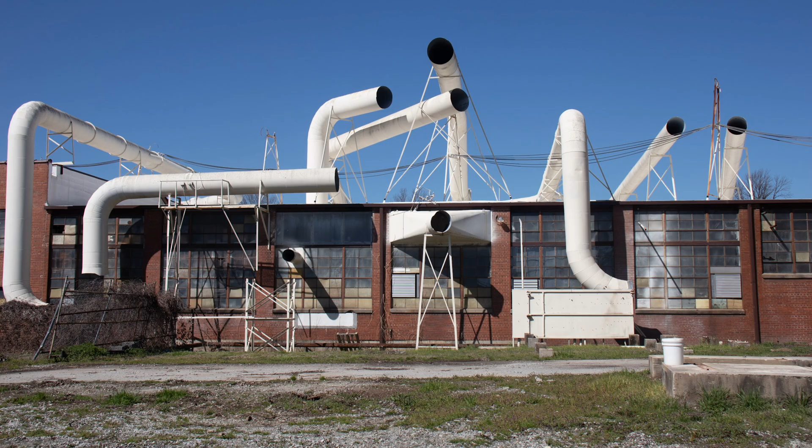So what I thought I'd do today to start off was showcase some highlights of Southwest High Point and some investment that's currently going on, whether on the public side or the private side, and look at some incredible opportunities with regards to the Heritage Greenway. When we were here almost a year ago, a little over a year, in February of 2023, we had the opportunity to take a deep dive and look at Southwest High Point.

So with Dorothy and the Southwest Renewal Foundation, we had the opportunity to look at the various areas, each with a distinct character, with a long history, close proximity to downtown, as well as the industry, manufacturing, and residential components in the area.

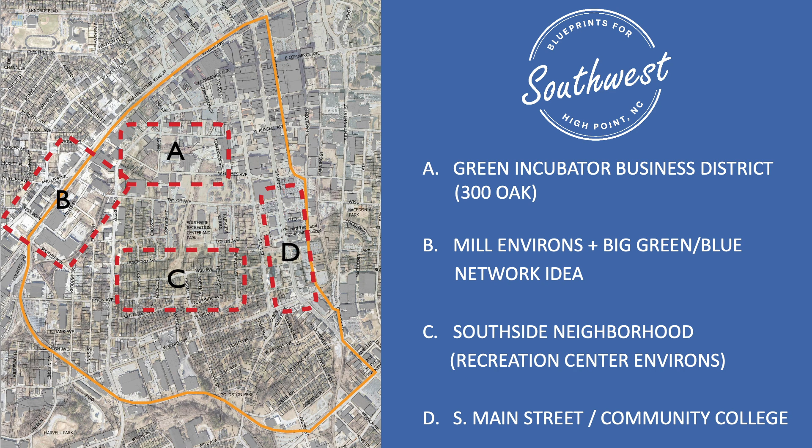This was looking at the Southwest, from 300 Oak, which the city has recently invested in with the Green Incubator Business District, to the Mill District along the rail line, whose economic reason for being has changed over time but still has incredible building stock. Then the South Side neighborhood around Fairview Elementary and the Recreation Center, and South Main Street, looking at linkages to GTCC and how to improve those connections—helping build up the whole neighborhood with access to jobs, education, and general livability.

So many of you all, a lot of familiar faces today. It's wonderful to see you all again. We're grateful to be welcomed back.

This was the process we did, walking around, driving around, taking a thorough look at Southwest and looking at the opportunities—some incredible structures and some incredible opportunities to build more complete, especially as the industry has changed slightly, building on the long legacy in High Point while also adding to that.

The South Side neighborhood—looking at opportunities for additional housing and ways, given the long legacy and history in the neighborhood, to maintain that residential character and help existing residents and community development initiatives ongoing in the city and previous planning efforts, really taking a look at the adaptive reuse of buildings and how to continue that momentum and energy.

We set up at Pandora's, working on site, starting to sketch some designs and ideas, and that was a really fantastic process. We were able to have a lot of solid community conversations and get input to move forward.

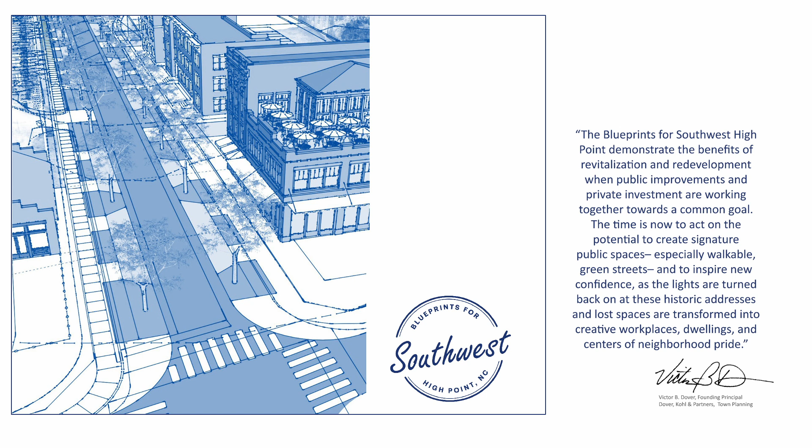As we came up with these different designs and scenarios, we created a document called the Blueprints, which is guidelines and recommendations for moving forward together. So I'm going to show you some of the ideas and recommendations.

This, I think, is a really great example—something we looked at in February 2023, where a small building can have a big impact. We talked a lot about when a pebble drops into water and the ripple effect from that. This is really exciting at 520 West Green and the opportunities that have come along with this property.

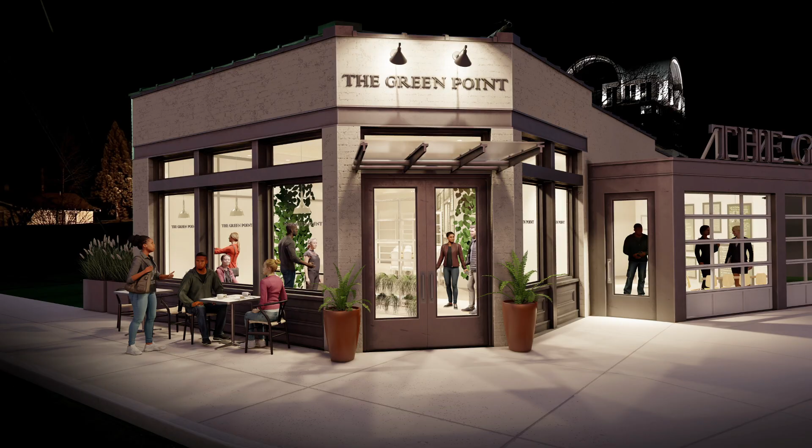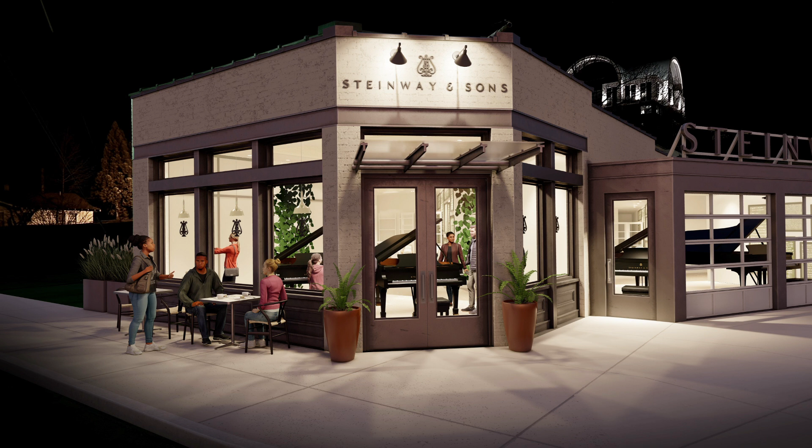Looking at how a building with the structure can have a variety of uses over time, how that building can be refurbished and rehabilitated for new uses. This is a very exciting project that Ritvan has been leading, and we're excited to say it's opening soon—is that correct for market?

A great opportunity, and it was really a wonderful process to start drawing some ideas and then have someone ready to give back to the city and make this building more complete. So very exciting with Steinway coming in.

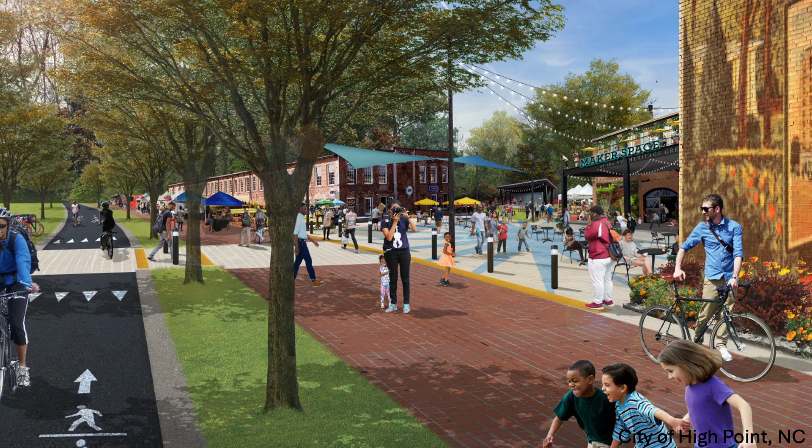300 Oak, with the city investment of the Green Incubator District, and also looking at the Greenway. One thing with 300 Oak and the Greenway, which the Southwest Renewal Foundation has been very helpful in leading, is the strategic infill and looking at how over time the properties can become more complete.

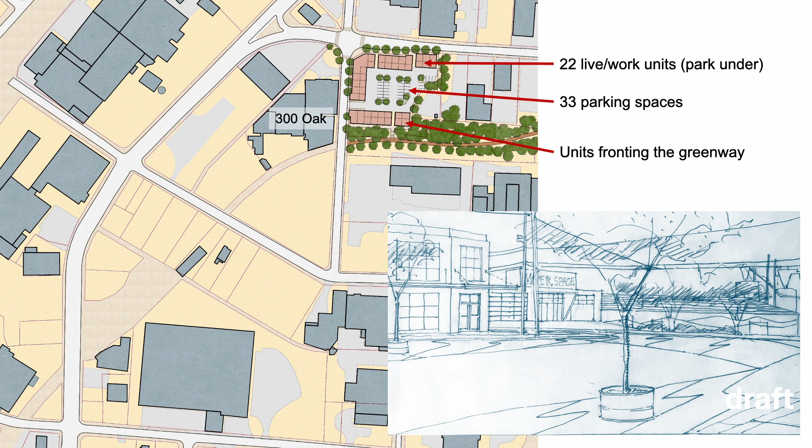This is incremental development, so it doesn't happen overnight, but over time. By having a plan in place, you can understand how to build those spaces more complete. This also shows an example of a mix of uses—a mix of housing types and a mix of uses.

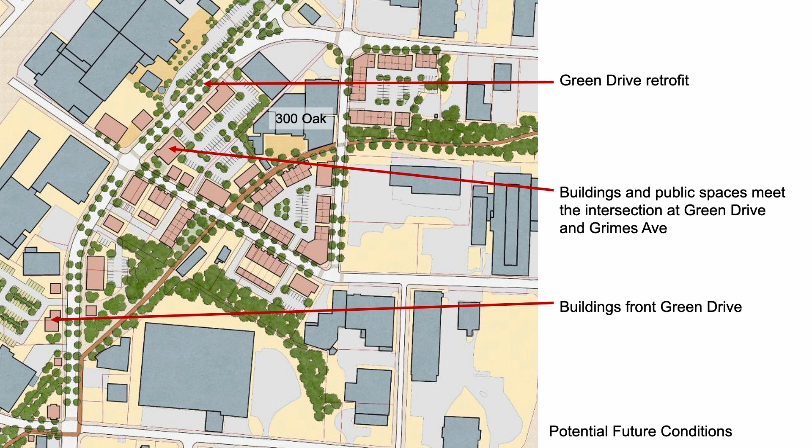How buildings confront the Greenway, and how to build a more complete green avenue—with the Greenway coming in with additional development and opportunities to front that space.

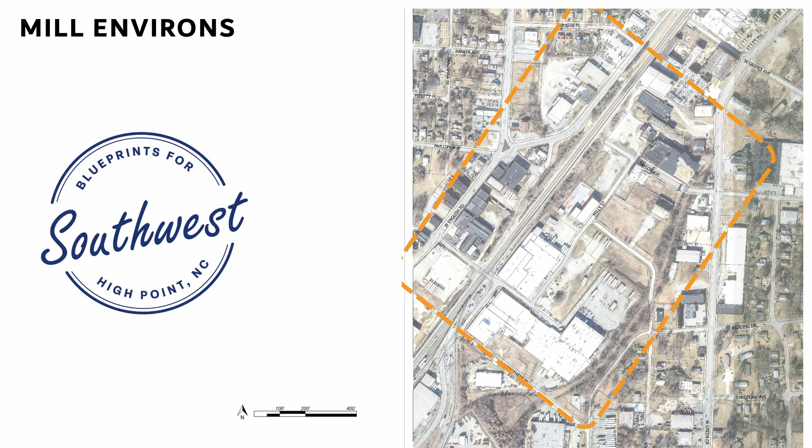Other components—looking at walkable streets, this is on West Green and Grimes. The Mill Environs area has incredible buildings, incredible opportunities, and with the Greenway, opportunities to encourage development and redevelopment along this essential green corridor.

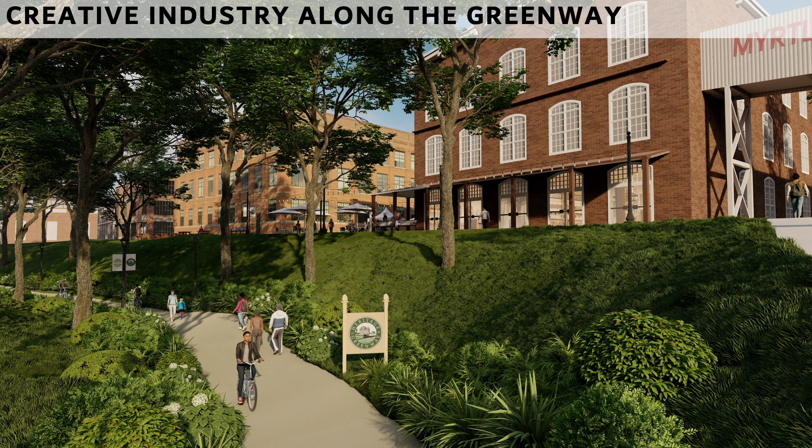This was a rendering that my colleague Robin Crowder created, over by the Myrtle Desk building, showing the opportunity of having the Greenway go through. We looked at the Belt Line and the High Line in New York—different examples of successful greenways throughout our country—and what that could be for Southwest High Point as well.

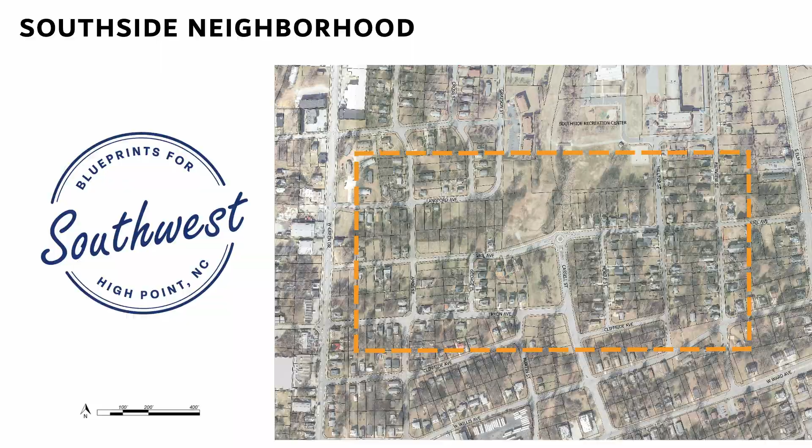The Southside neighborhood, looking at how vacant land can be cultivated to build back a more vibrant neighborhood fabric. The city of High Point has an incredible resource in its geographic information systems, so we were able to look back at aerial photographs from 1958, and it's really interesting looking at the building pattern with the blocks and streets and houses set up facing the streets.

Then over time, with the unfortunate circumstances of urban renewal, you can see from 1958 to 2022 how the neighborhood fabric was very much eroded over the past decades, and how to build back and reclaim some of those lost spaces to restore that connected fabric of neighborhood.

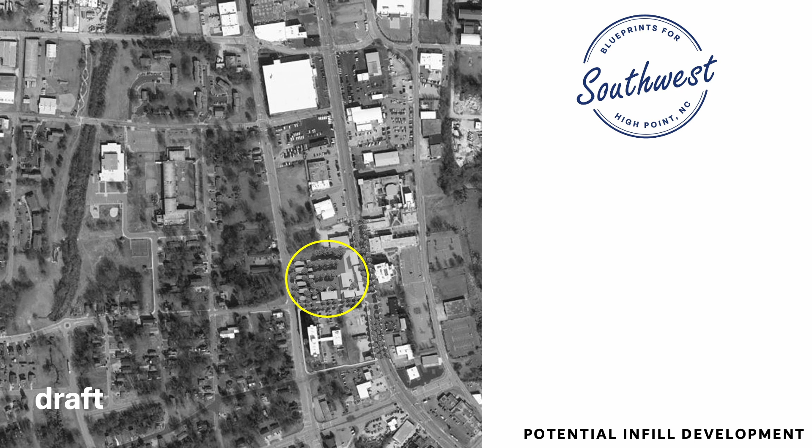One example we looked at was this parcel along South Main and Elm, in Vail I believe, and what that could look like as far as restitching the urban fabric of neighborhood. The yellow circle shows where we took that city block or parcel and looked at how you could have a mix of infill development and a mix of housing types and buildings.

So looking through the blueprints for more options for the South Side. Understanding that the blueprints is not necessarily a full-blown plan for the South Side neighborhood, but more some options and recommendations that build off of the existing plan for South Side that was done by the city.

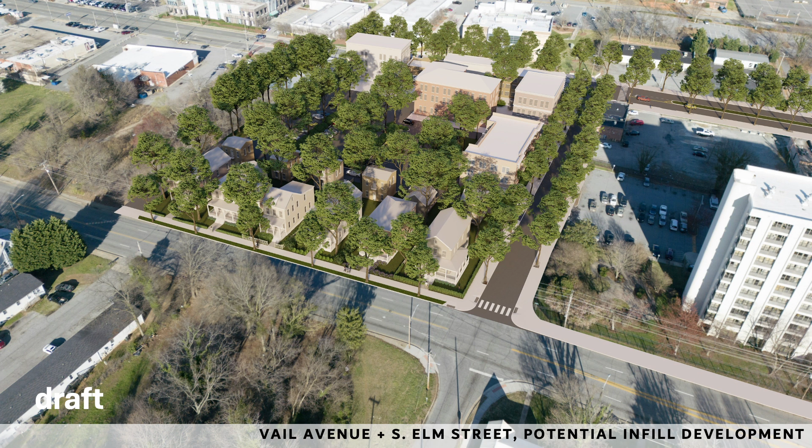This is a really great angle to look at - this is that same parcel, currently open space right along South Main and South Elm, and what that would look like with a new mix of housing types, having more single family or multifamily residential facing the neighborhood, with more mix of uses facing South Main. So more intensity of uses along the bigger corridor, but in the neighborhood, smaller scale development allowing more housing opportunities in the area.

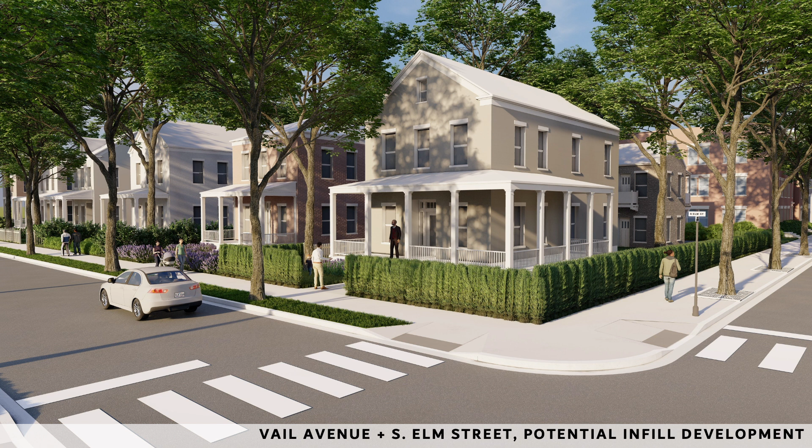These are all conceptual sketches just to get an idea of illustrating a vision rather than just using words to describe it, to make sure we're on the right track with the things folks are looking to see in the neighborhood and in the area.

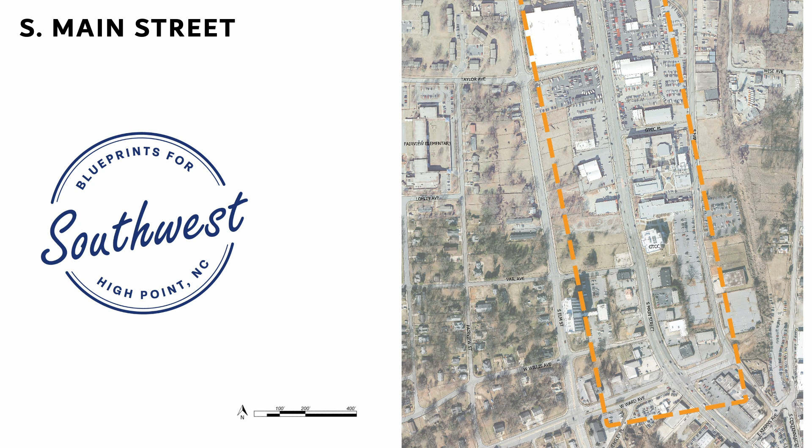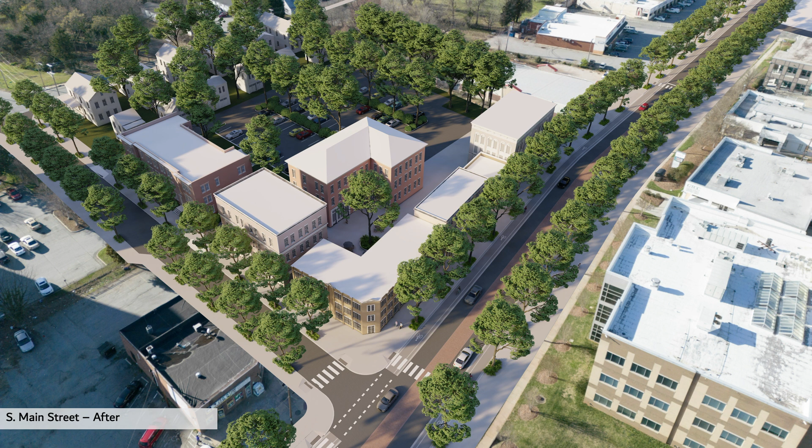And then the area around South Main Street with the community college, and how to make the connection. This is actually that same parcel, just looking at it from a different angle, creating a more walkable South Main and having street-oriented buildings facing that street as well.

When we gathered in February of '23, we asked folks for one word that describes Southwest High Point today - granted this is about 1.5 years old, so hopefully some things are starting to change - and then what they'd like to see in the future. This was really encouraging to us as we worked on the blueprints document, looking at the future with a lot of hope, prosperity, and opportunity.

So this is the blueprints document that many of you have seen, also on the Southwest Renewal Foundation website. It's maybe 20 pages long, but it synthesizes some of these initial recommendations.

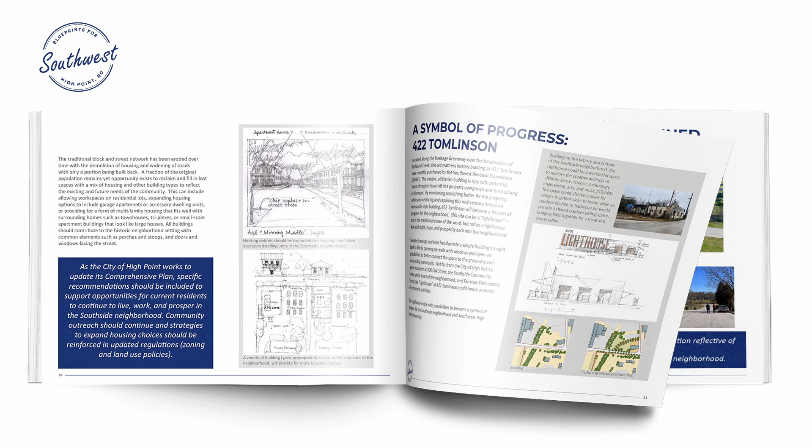What's been really fantastic is that Dorothy and the Southwest Renewal Foundation have been able to take a lot of these drawings and illustrations and apply for grants and different opportunities to start working towards implementation - whether it's West Green Drive or the Greenway, being able to put these tools to work and start looking towards implementation.

So while all of that's been going on with the blueprints and grant funding, we are super impressed with what you all have done as a city and community with your comprehensive plan. When we wrapped up in February of '23 and knew the comp plan was coming, I had no idea how much detail and momentum could happen in such a short amount of time.

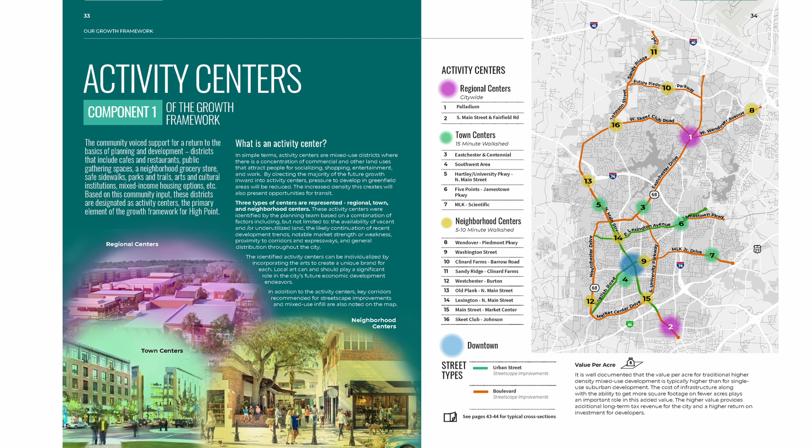So very impressed with that document and very much honored that the Southwest is highlighted throughout the comprehensive plan, which has been adopted by City Council. Part of that is the Southwest was featured as an activity center, a town center. That's really important because this is the area around 300 Oak, and these are pages from the comprehensive plan.

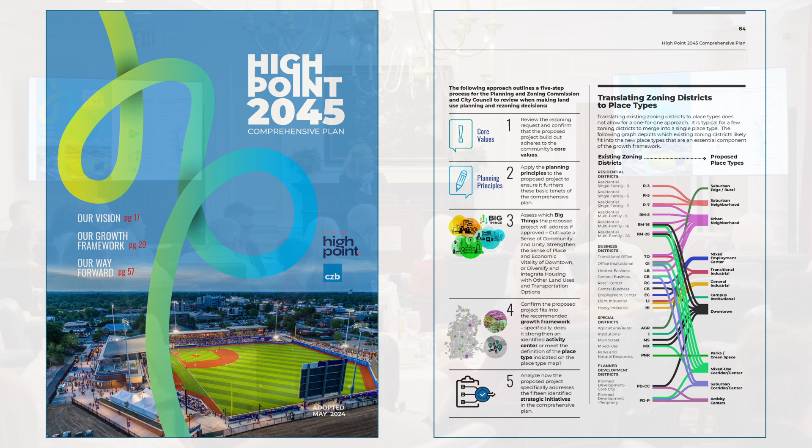They talk about that mix of uses. Right now in Southwest High Point, a lot, especially along the rail line, has been focused on industry. But looking at, in addition to industry, with light industry and small scale manufacturing, are there opportunities to introduce additional uses to make the area more complete? Part of that you all have been working towards is looking at your overall land development regulations and zoning. One thing that came out of the comprehensive plan was the idea of a transitional industrial district, which still focuses on the legacy of town building and manufacturing industry, but also opens up the idea for additional uses and opportunities.

What we find very exciting is that the transitional industrial area highlighted in the comp plan is basically the Southwest District. I share this and our enthusiasm for it because it's like we're all saying the same thing. It's just a matter of how we get there and how we start to make that positive change happen.

So what is transitional industrial? These are some key things included in the comp plan that help identify transitional industrial as allowing mixed use, reuse of existing buildings, adaptive reuse, live-work districts. A lot of that happens in some of the historic mill villages, but it's the opportunity to be able to live close to work and have that opportunity as well.

Light manufacturing, because one thing we want to make sure, especially with this industrial area, is that the long-time economic reason for being for High Point is maintained and preserved as well. And then looking at parks, plazas, and neighborhood serving retail to enhance the overall character and livability of the area. So primary uses associated with transitional industrial are still the focus on live-work, light industrial, and makerspace, but then it's complemented by additional uses like residential and commercial.

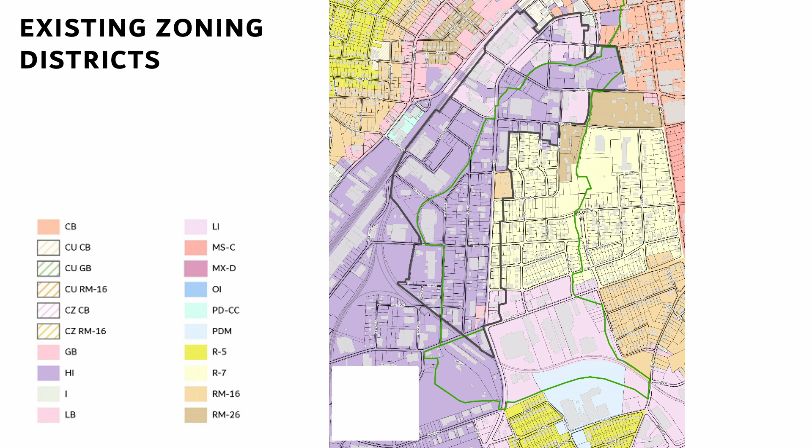The existing zoning districts, so the dark purple here is heavy industrial, and the light purple that's a little bit hard to see, around 630 West Green, that's light industrial. So what we were doing as part of our analysis was looking at the existing regulations and what's currently allowed in light industrial and heavy industrial, and what may be some changes looking forward in the future.

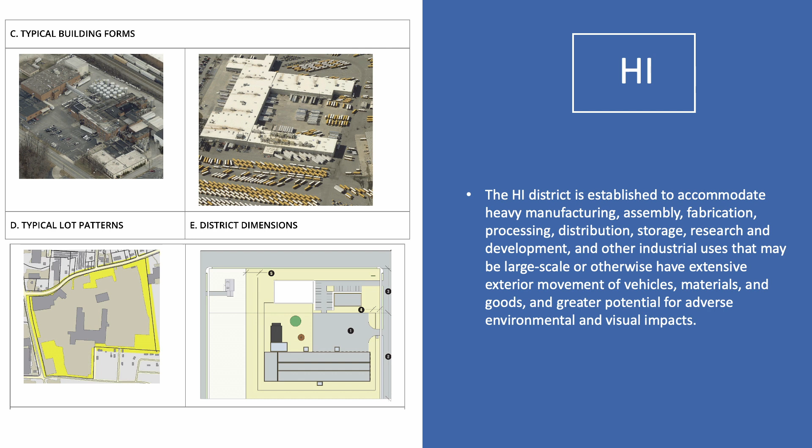Right now, where we're at in the process is we've got the concepts and the blueprints, and now looking at the opportunity for land development regulation changes and looking towards implementation.

So I'd like to invite my colleague, Victor Dover. He's going to give us a little bit more with regards to opportunities in mixed-use industrial.

Thanks, Margaret. She's got more later, so I'll have to do another round of applause coming up.

About a year and a half ago, I had a chance to talk to many of you, and I said, cities are works in progress. Remember that discussion? That they're like works of art in which many, many people are collaborating that are never finished. Some of the collaborators will never meet each other because they live in different centuries. That's the process of city making.

We inherit what we have, what was used once upon a time had this or that economic reason for being, and we repurpose it, we recycle it, we adjust it, we add to it. Sometimes we remove things and add new things back. That's the process of city making that's never finished. It's why I'm always saying planning is a verb. Can I get a nod of agreement from the city staff to that idea?

We're never finished, right? But you have this great tradition already underway here of inheriting buildings and spaces and street addresses that once upon a time had one use or one purpose, and modifying them to adapt them to new uses. And it shows up in a lot of different ways. Obviously, in Congdon Yards, a phenomenal national example of that in a very big way.

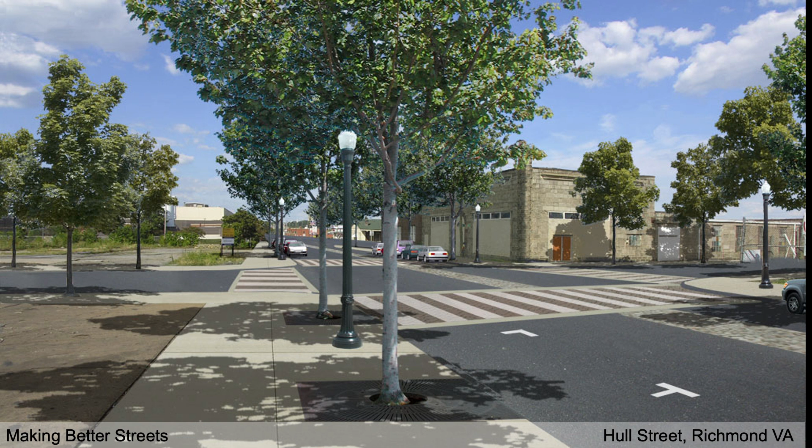If you go just a bit to the north in Richmond, you find old industrial spaces like Hull Street, the way we found it in 2005, actually. That was, I told you before, we were in the before and after business. So we started making pictures of how that place could be transformed as infill development and adaptive reuse of the historic structures took place, and even projected forward into a longer distance future in which they start to adjust their transportation around the reinvigorated, repopulated, thickened up with buildings centers in places like Hull Street in Richmond.

And what do you know? Out of that bubbles up Hull Street Action, an organization that is implementing the vision, every day.

I want to switch just for a minute to talk about why zoning matters so much. I know Margaret showed you some very abstract maps and long lists of land uses and so on a minute ago. Why does that stuff matter so much?

Well, in the time before there were strong land development regulations, during the industrialization period, first in England and places like Manchester and Liverpool, and then in New England, and then in the Sun Belt, we implemented a whole lot of industry without much care for how it was going to affect people's public health. And it took a lot of a 100-year effort, really, sustained around public health and the public health, safety, and welfare, that phrase from our Constitution, which explains why we adopt laws.

We adopt such laws as necessary to protect the public health, safety, and welfare. And there was nothing safe or good for the public welfare about living in the smoke in the dangerous, toxic industrial city. Out of that came a lot of land development regulation. And it seemed new, the idea of segregating the land uses, pushing housing farther and farther away from those dangerous and toxic industries of the time.

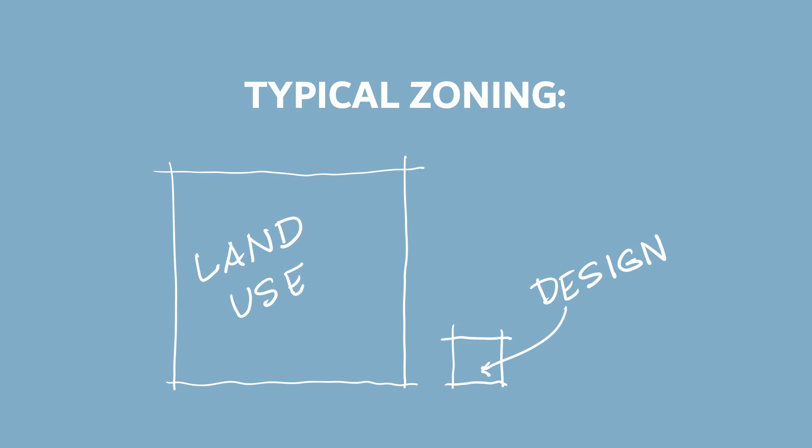Well, all you have to do is look at other places which have gone through this kind of transitional industrial process that Margaret described. You could go to the Warehouse Arts District in St. Petersburg, or to the Brewer in San Leandro, California, or to the Pearl District in Portland. You know why those patios are set at the height they are in the repurposed industrial buildings? That's the old loading dock height, set to the height of the truck. You can go to places like Seattle and see examples like Charles Smith Wines, where the old industrial buildings have been repurposed, and they're beautiful, and they have not swept away their history in a kind of slash-and-burn urban renewal program, scraping everything off and starting completely from scratch.

We all know that didn't work very well. Instead, they've kept the existing buildings and built in and among them, adding to them and modifying what's going on inside. The Hive in Oakland, California is their answer to Cohab. I think they probably need to come study Cohab and see how well you've done it, John, and then they'll even up their game further.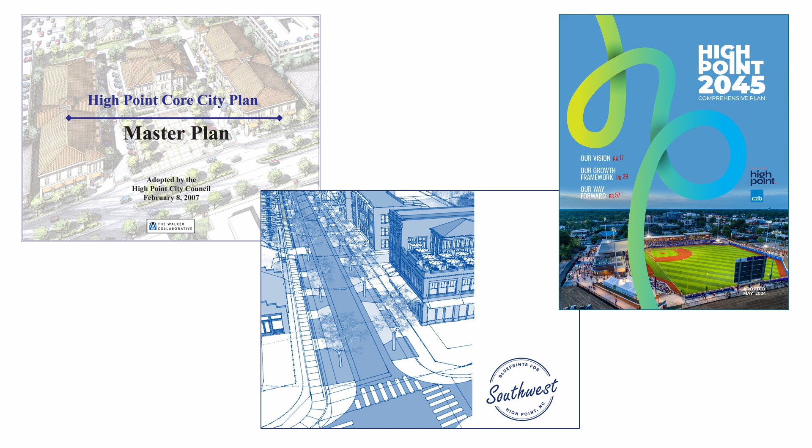Thank you, Victor. So looking at the High Point Core City Plan and the blueprints and the comp plan, you all are very much on your way to helping with initiatives. And with the city of High Point, they have the targeted investment areas centered around 300 Oak and West Green, so some financial incentives as well.

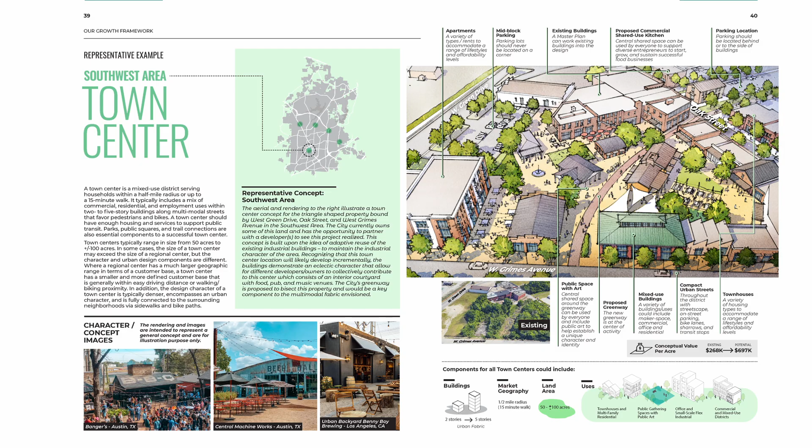And then like we were sharing with the comp plan, we thought we'd go ahead and break it down. So this image, which we think is really fantastic and was created by the planners at CZB who are working on the comp plan—we are excited that Southwest High Point, in the area around 300 Oak, was featured as the town center example for the entire city. So what we thought we'd do is sort of break it down like an X-ray of what makes this image appealing. What is it about it?

So we've got some adaptive reuse of the existing building, the addition of new buildings. What's labeled A could be maker spaces, B apartments, C gathering spaces, and D reuse of the existing building at 300 Oak. So all of these different elements are this strategic placement of new development on disturbed land.

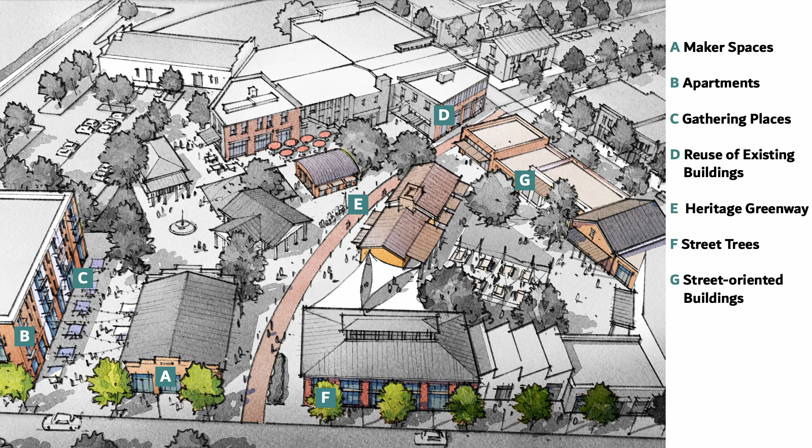And then looking at the Heritage Greenway coming in, the addition of street trees, street-oriented buildings where doors and windows are facing streets and public spaces. It sort of gets into some of the back-to-basics, but an image like this is really telling because it's stunning. And so you really have to look at what makes that place special—what are all those various components?

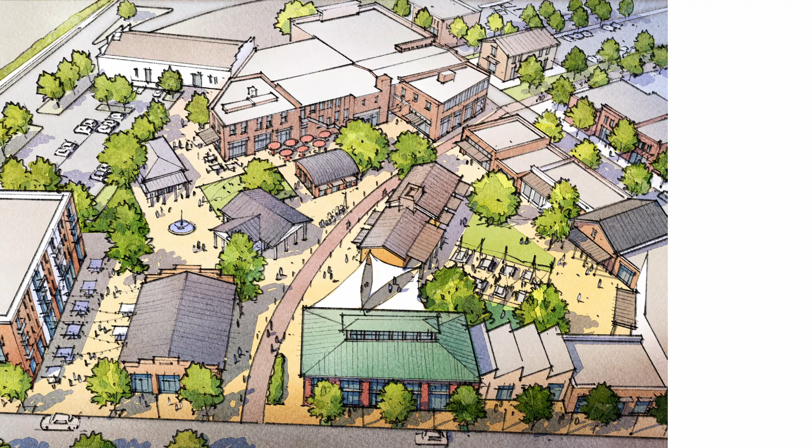When we've been looking at the land development regulations, as I mentioned earlier, with the heavy industrial and the light industrial, these are some of the things we flagged as items to consider: incorporating a greater mix of uses in the Southwest, street-oriented buildings, building on that legacy of doors and windows and walkability in the area, walkable streets, and continuing to support small-scale industry.

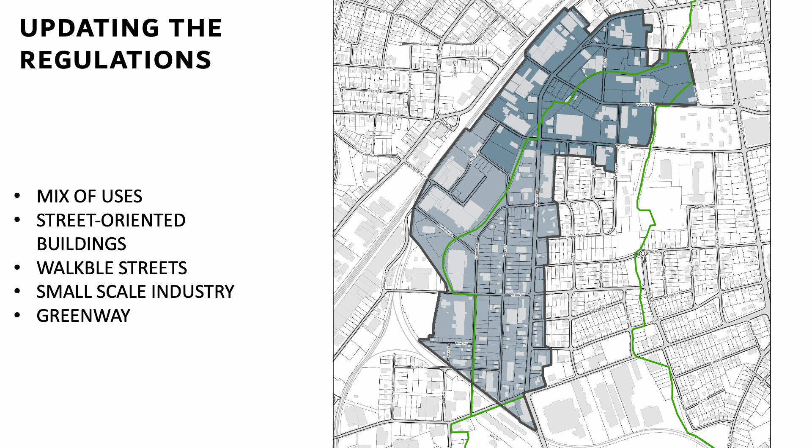This is important because when you're looking at the land development regulations and the existing buildings that are there, many buildings—especially down towards Pickett Mill and some of the other areas—have large areas that are also used for storage as well as deliveries. So there are things that need to continue to operate and to continue to be available and accessible, as well as looking at the Greenway.

What opportunities could we use with land development regulations to support the Greenway? One thing—and I'll show this in just a minute—is that there aren't currently land development regulations supporting it. So let's say, for instance, as the Greenway's developed, a lot of buildings are turning their backs, or putting some not-so-great things in their backyards that front the Greenway, chain link fences or different things where it's set apart from the community. So we need ways to protect the Greenway as public infrastructure.

So those are sort of some of the key things, as well as looking at parking. There's definitely some issues with some large parking lots eating up what could be very vibrant corridors. So these are some of the things we're going to be looking at, as well as what makes up that town center as far as looking at a walkable area.

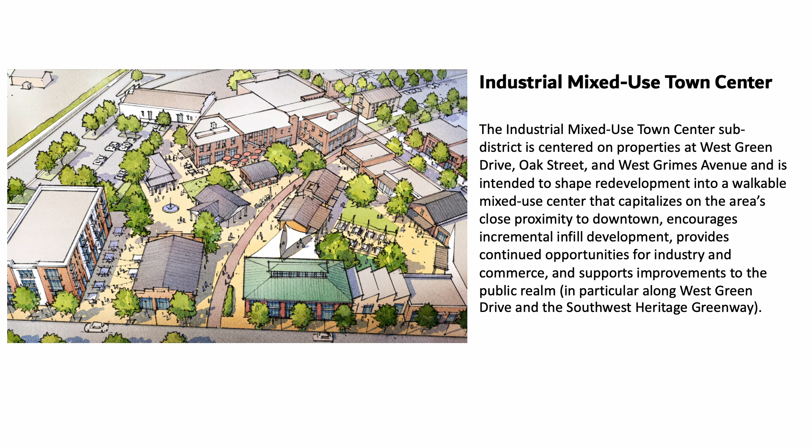I made Margaret let me show this because these are the more exciting pictures. We did show the before and after image in the past of what this area could look like right down on Green Drive. And then we went back to talk about what should be in a new mixed-use industrial zoning district. We had to look first at what is not just allowed, but probable under the existing zoning without any additional standards or guidance.

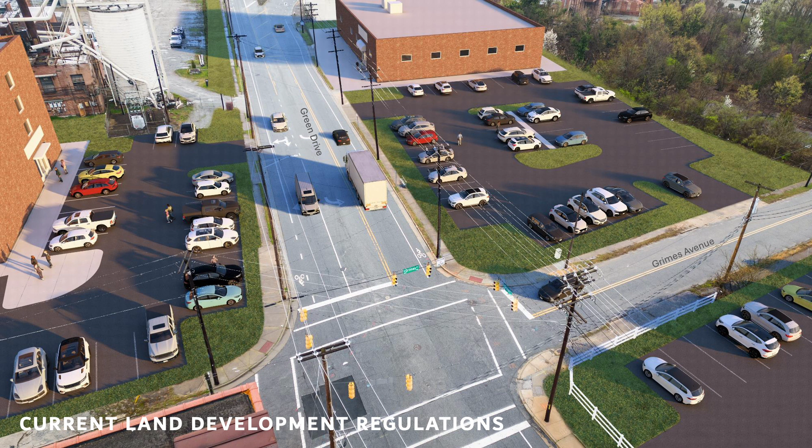What will tend to happen is single-use buildings set far apart. For example, you probably end up with parking lots on the corners, right where that sense of public space dissipated from all the urban renewal in the past. There will be space between the buildings, but not meaningful public space. And then we'll probably end up with buildings that have few eyes on the street, the windows and balconies that give natural surveillance and make it safer, but also make it look like a place where humans live and work, not just their cars.

So it's easy to pick apart an existing zoning code and imagine the worst case scenario somebody might design if you don't fix it. But what would we do if we did fix it? Now, everything I'm about to show you is just a draft, work in progress, thoughts put out here for your feedback and to enable a better discussion with staff.

The first thing to realize is that the scene is really an ensemble that consists of private effort on the private lots and public effort in the public right-of-way. So we drew a little white line to remind you where the property lines are, and the code provisions, that's the zoning rules, are going to apply to the private development.

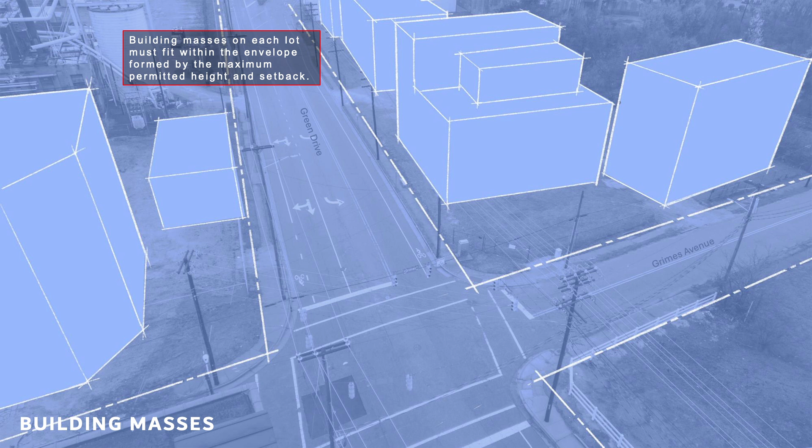And then imagine what someone would do if enabled, if you could make it economically feasible for them, for example, put the parking in the back instead of in the front, put multiple uses and multiple revenue centers inside the building they plan to build or reuse instead of just one, and what the building mass and volume would be allowed to be.

And then this idea of civic spaces, which is enshrined in the comprehensive plan and the code, that places like maybe that all-important corner is a good one for public spaces that feel like human habitat, not just parking spaces. So in addition to our street front, right on the sidewalk kind of addresses, we could also have addresses that are on a neighborhood square or plaza or four corners.

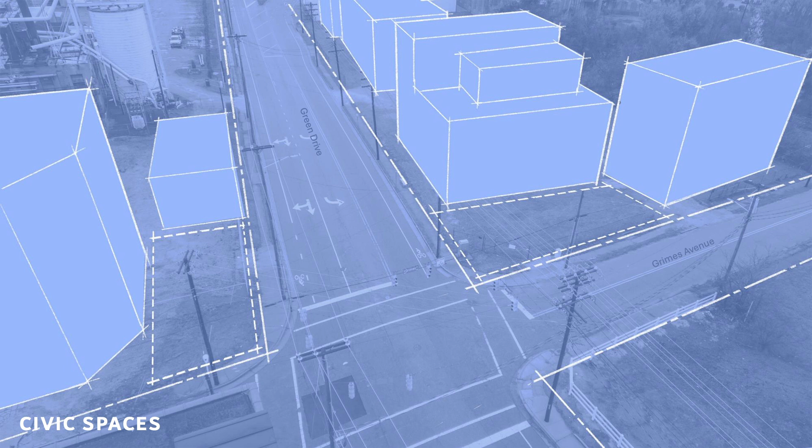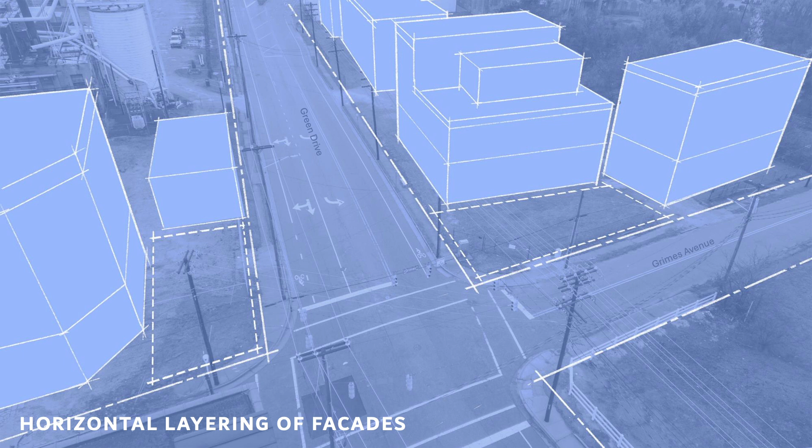Now, in design, you start thinking about not just the box, or the volume, but the way it's divided into a bottom, a middle, and a top. Those great old examples I showed you from history always had this kind of design grammar in their architecture, first marking the tops of the buildings, then thinking about how to layer the facades horizontally as they go up. So that's where we start thinking about how to add transparent openings to the walls.

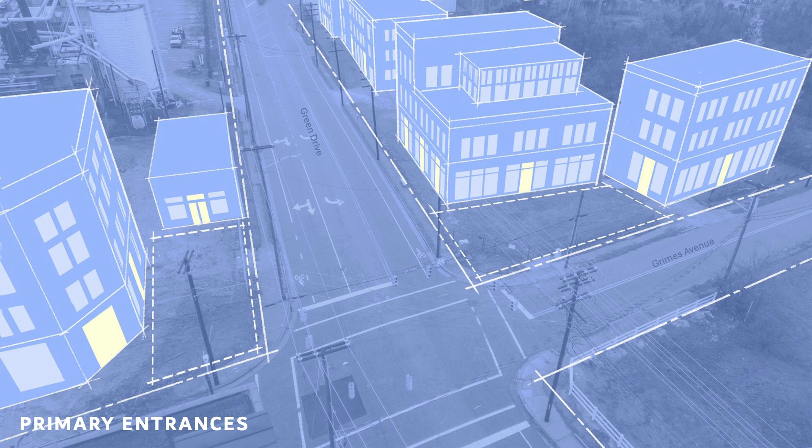Here you see windows added upstairs and storefronts and windows added downstairs. Think about where entrances would go. So these are things that normally might be completely left out of a zoning code that are very helpful. They're enabling for someone who wants to maximize the use of their property. And you can go on from there.

Things like those encroachments and appurtenances that people add on to buildings, like the awnings, for example, or canopies that protect their storefronts from glare in the sun or protect patrons from sudden storms. And those are the ingredients that lead to the after picture that we showed you before.

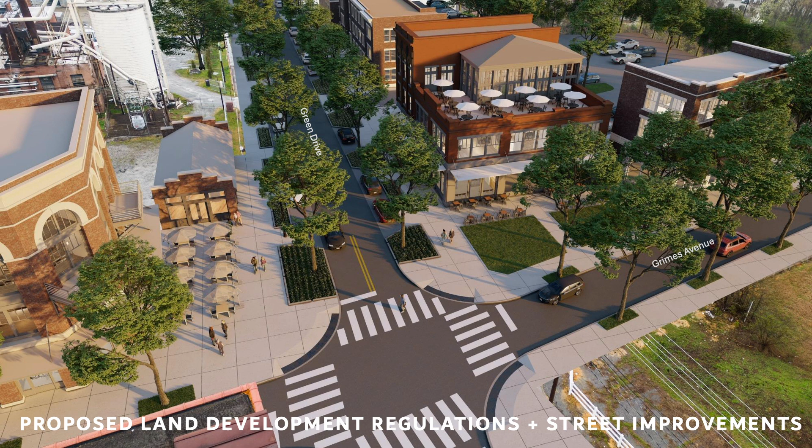Well, not quite, because this is just the private development. But we also have all that public real estate owned by local government. So let me just do that again. Here's just building the buildings and still leaving power lines on both sides of the street, insufficient skinny sidewalks, way too much asphalt, and a lot of pollution and runoff that comes from a gray version of Green Drive.

But what if we green the street again and add street trees and rain gardens, cut the asphalt for driving and parking to the right amount instead of an excessive amount, and fix the design of the intersection so that a person who's already parked and came to the district might be inclined to walk from one of these places to visit to another.

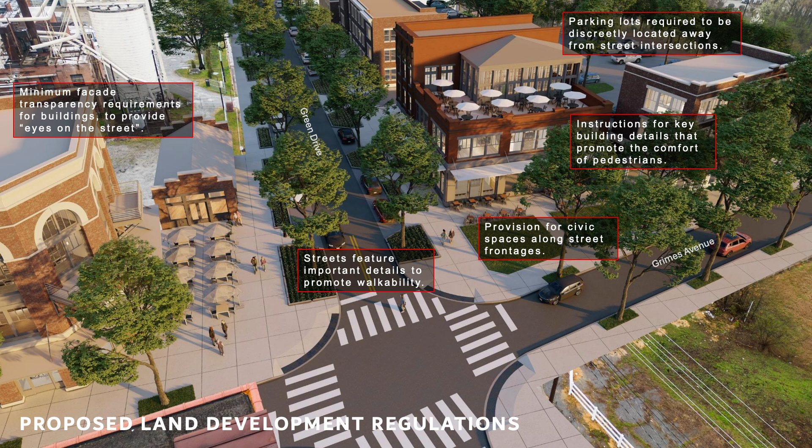So that's kind of a list of ingredients we take into account when thinking about how to make a new code that's both more flexible and more predictable. You want to empower people, enable them to do things they're currently prohibited from doing. The most obvious one is adding residential to the list of mixed uses. You also want people to build to a certain quality standard, not just safe from the danger of fire or that kind of thing, but also economically robust, encouraging their neighbor to implement something equally good on the property across the street.

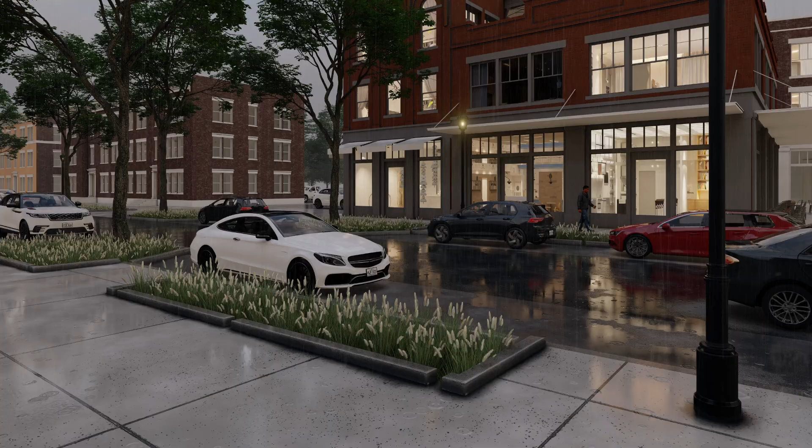So the illustrations we did for the blueprint were kind of a testing ground for what would be in such a rule book. Now there's always hand-wringing and consternation when we start saying something like windows on the ground floor of your building would be a good idea, because that sounds like we're adding rules rather than just enabling and repealing some. So it will undoubtedly need to be a mix of both things.

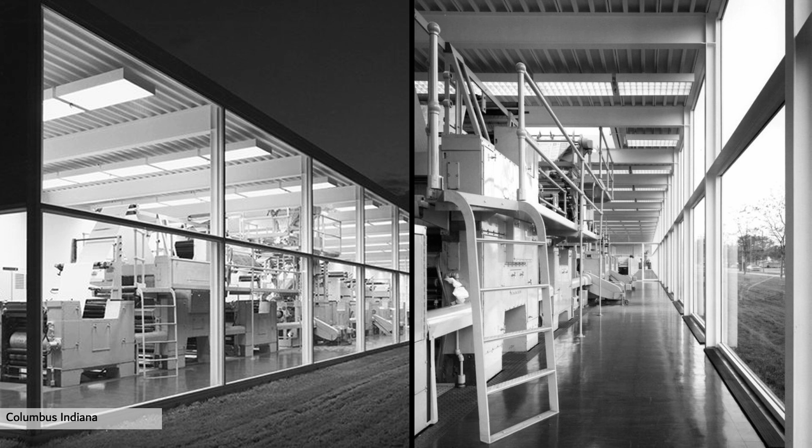But I think it's important to realize there's a long industrial tradition, including the historic industrial structures I showed you so many pictures of, from your own history books and from examples around the country, of allowing for transparency on the facades adjacent to industrial buildings. I love this very modern example in Columbus, Indiana, where their newspaper plant is inside a glass curtain wall building, and it's all the bright yellow machines inside spinning at night and making newspapers on display for everyone going by outside to see.

It's actually kind of miraculous. It's like they made a gallery exhibit and high art out of their industrial production, and they let everybody see it by turning on the lights inside the building and having some windows facing the street. I suppose we've said windows enough times, I'll just move on.

We also know we need to do things that are pretty basic, like parking and loading and unloading in a neighborhood like this. So we need the street designs and the site plans to be flexible for just those kinds of things.

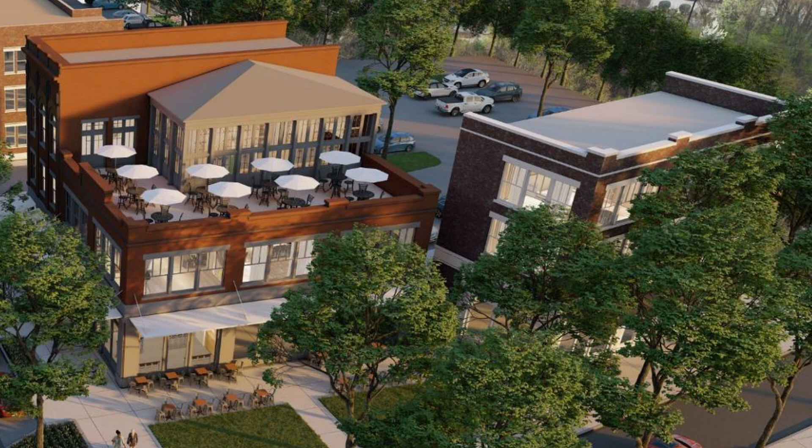I'm going to back up to the picture I showed you a moment ago, because whenever we show a picture like this with all the pretty trees and upgraded buildings, someone says, 'Where's all the parking?' So I'm zooming in just so you can see - there's actually room on these lots to do plentiful parking. It's not like you're building buildings instead of having parking.

Thankfully, you don't have a ridiculous minimum parking requirement, which so many cities around the country are now having to painfully exorcise, I think is the right term, from their zoning codes. Yours is already out, that's good. But parking is a normal part of these site plans as well. It doesn't always jump out at you in the renderings unless we show it to you.

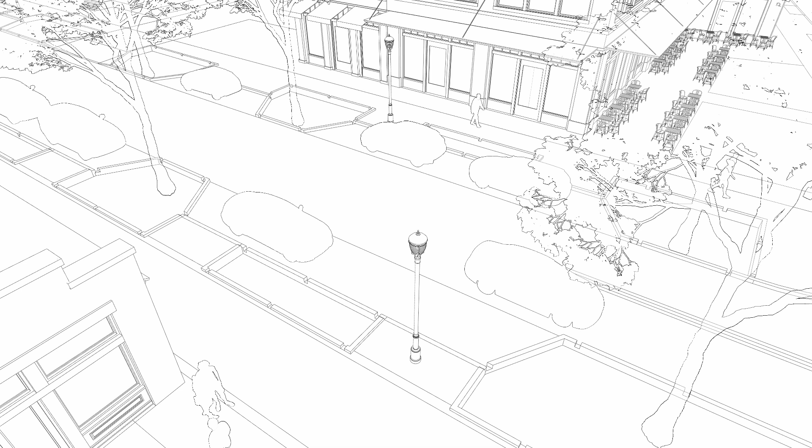With the renderings that we've been creating from the blueprints, we also find them very helpful tools, almost like x-rays. So these are just some of the things we're working on as we're looking at the land development regulations for the Southwest - looking at, as Victor was saying, the private improvements, so what land development regulations control on the private property, as well as what public improvements would look like.

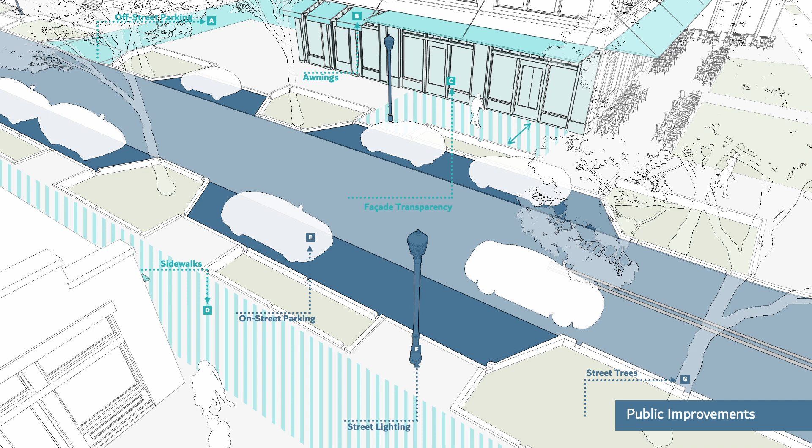I think these renderings are very helpful because they show an idea of a vision, but then when you really get down to things, like with the town center image from the comp plan, what makes that image so appealing? What are those elements? So we've also been doing some research from other cities, as Victor mentioned, looking at precedent photos as well as looking at their regulations.

So looking at the Beltline in Atlanta, or Scott's Addition in Richmond, or the Mills in Greenville, South Carolina - not just that they have incredible historic architecture and building stock, but how are they using their regulations to protect and encourage the revitalization and redevelopment of those areas?

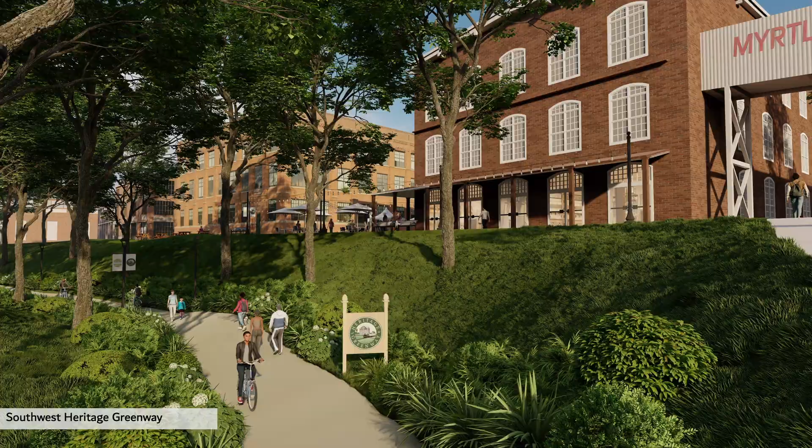So just looking at some of those examples as well - the Highline in New York, Farmville Virginia, the High Bridge Trail. Farmville is really interesting with Greenfront there, with the reuse of the mills, the tobacco warehouses, but looking at the vibrancy of being on a greenway, being on a green corridor, and what that can mean for the Southwest as well.

Let's just be clear - if they can do this in Farmville, Virginia, you can do this in High Point. You can do it.

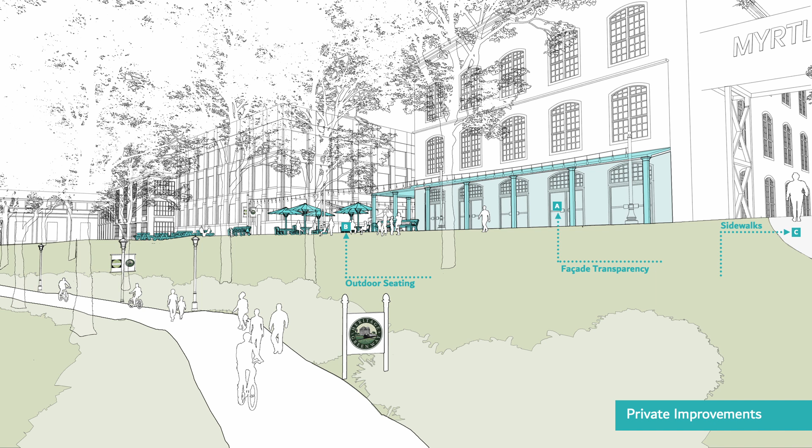I think this example is very telling. So once again, looking at the rendering of what could be for the greenway, and getting down into those details of what makes that work with doors and windows facing the street, treating the greenway as a primary entrance as well as the street entrance. And then the public improvements with implementing the greenway with the lighting and the greening, really making this path central throughout Southwest and throughout High Point.

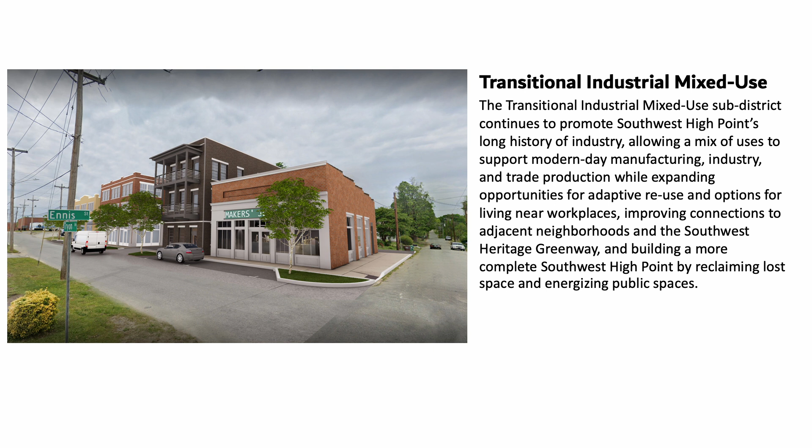So with all of that said, with the town center area around 300 Oak, we realize, as I was mentioning earlier, that many of the industrial uses may not create as much of a walkable environment, but yet there's still opportunities to add a mix of uses.

So this was an example at Tryon and Ennis, looking at this existing building that's there on the corner. It's an incredible opportunity for rehabilitation. There's a church across the street, and then it looks like a corner store adjacent to it. And then there's single-family residential, as well as getting more into the industrial uses.

So this was an example to sort of show, like the 520 West Green, what would happen if you were to turn the lights back on in this building. So sort of looking at some initial renovation of the existing historic structure with the idea of getting a maker space or small scale manufacturing with a storefront there.

And then in time, as redevelopment continues to happen and opportunities to get more of a mix of housing or residential in there, this was sort of influenced by what we've been seeing in Richmond, Virginia. So you have the opportunity to live and work all in the same district.

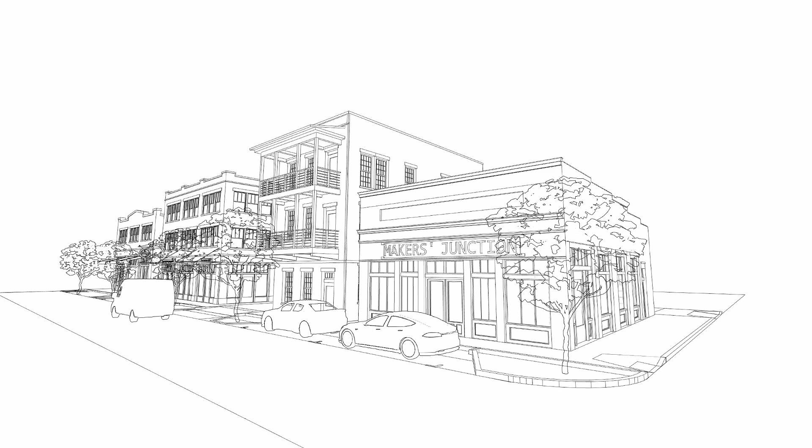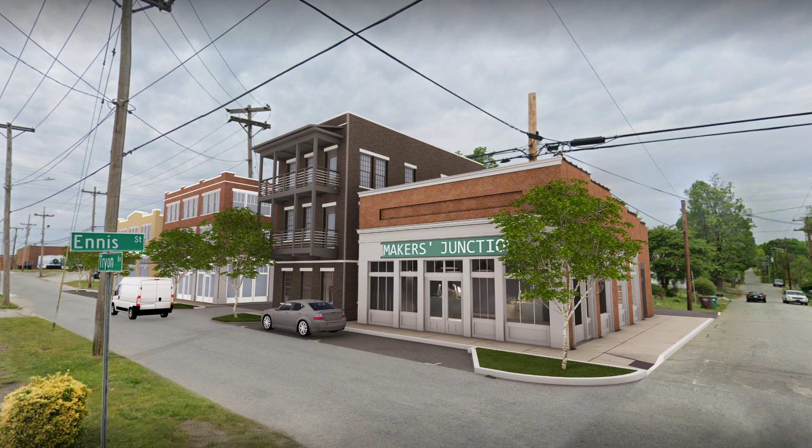I know regulations is sometimes a difficult topic, and it's a lot to process, and we're appreciative of you all hanging in there with us. But I think the main thing we're curious about is, are you all ready for this next chapter in your story for Southwest High Point? Are you ready for this mix of uses and this legacy of industrial, and how to continue that?

Let's see a show of hands. How many of you think this is on the right track and we should keep going? Yeah. We should do that again and get a picture of that. How many of you think this is on the right track? And we should keep going.

Thank you very much, well, once again, we're grateful to be a part of it. We're open to take any questions or hear any initial thoughts you all may have. Anyone have any questions as we...

Oh, hold on one second. Next steps. I want to make sure that this is super important.

So what we've been doing with the blueprints, as I said, is more of a conceptual framework leading towards, as the city has adopted area plans, actual policy planning documents that would be adopted and approved. So as far as next steps, what we're going to be working on is taking the blueprints and transforming them into an area plan for the area along West Green. So that's what we're going to be working on.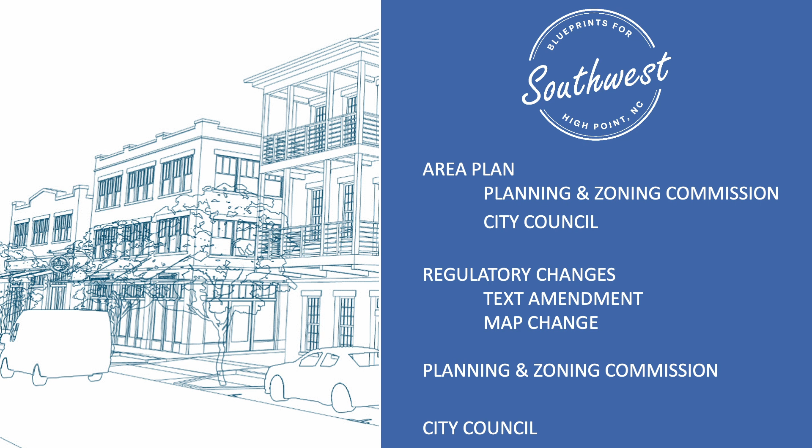So there will be time for additional public comment for public process, and that will go through the Planning and Zoning Commission as well as City Council. If and when that is approved and moves forward, that's when those regulatory changes can start to happen. And so that's important. We are working on a draft of regulations, and we're ready to continue to move forward once the area plan moves forward.

But there is a public process. So this is, I would say today, more of an information meeting to get everyone up to speed with what we've been working on with the blueprints.

And then there will be that formal process coming as well. But we really wanted to gather here today at the String and Splinter with you all to get some initial feedback and make sure that things are headed in the right direction. So thank you again for being here, and I'm happy to answer any questions you may have.

Could you talk a little bit about the difference between town planners and town planning and design firms? I know not all town planners also have the designer. Sure.

Well, I'll start and then you could. I would just say that in the world of city planning, there's all sorts of different elements that go along with that. A lot of city planning is policy driven, looking at your comprehensive plan and your area plans, and then you can also combine that policy planning with urban design and town planning. And so at our firm, many of us are trained as architects as well as city planners, but we add design to the policies. And so that's why what you've seen today with so many different illustrations and renderings, we really like to add the pictures with the words.

So our office is a combination of urban designers and town planners. I myself am a traditional city planner. I got my start with historic preservation and then started in planning. Unfortunately, I can't draw or do all these amazing computer renderings, but I can write and I can do policy. So there's just a lot of different elements that go into city planning, and I feel really fortunate with our firm where we're looking at the holistic picture of planning, not just words and policies, but also shaping that vision and working with communities and designing in public is what we really enjoy doing.